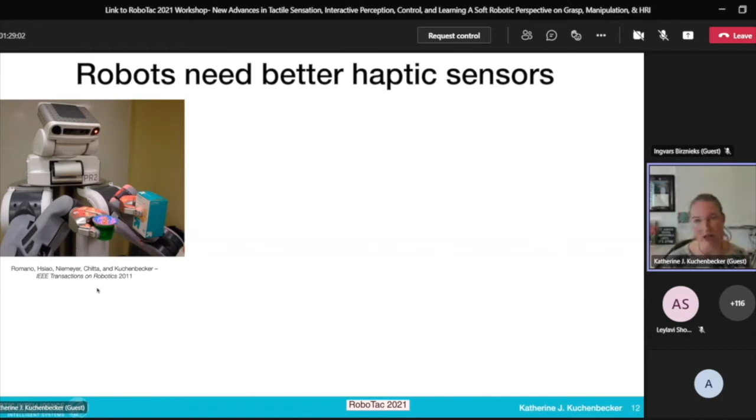But just to take you back, when I was an early professor at Penn, we took part in the Willow Garage beta program. We had a PR2, and we did some work on using its rather rudimentary but robust and functional tactile sensors. There were just a small number of pressure cell sensors on each of the fingers, and they could only be read at like 24.4 hertz, but luckily there was an accelerometer in the wrist, and you could use that to get hand clasps,

and if the object in the robot's hand was set down, you could get transients. You get high temporal resolution from the accelerometer, and something about pressing and squeezing from the finger pressure sensors, but they weren't rich enough to really even identify what the robot was touching. You could pick up stuff without knowing much about what it was.

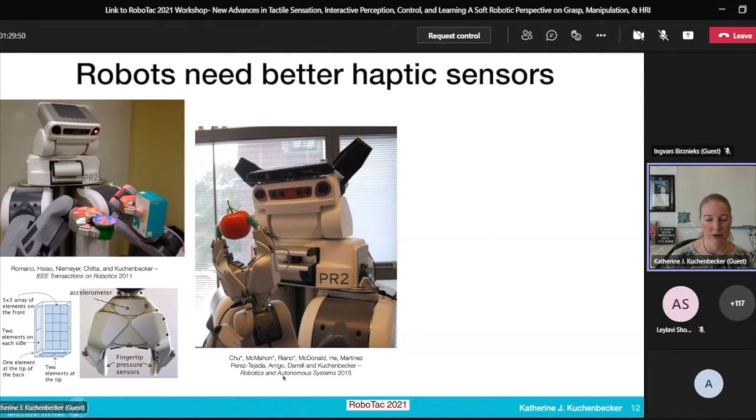And so working with Trevor Darrell at Berkeley and a bunch of wonderful students, led by Vivian Chu, Ian McMahon, and Lorenzo Riano, we added BioTac sensors. These are sensors that came out of Jerry Loeb's lab at USC for prosthetics, and they imitate the human sense of touch by having many channels. They're biomimetic. You can sort of get shape.

It's actually an impedance system going through fluid inside the rubber skin. There are all these different electrodes. You can get the internal pressure, the AC pressure, which is about the vibration, and something about the temperature. But you can't really physically interpret these 19 electrical impedances in terms of forces. It's absolutely not a force sensor. It's closer to a deformation sensor, but even there, it's not so physical. As a mechanical engineer, I'd really like to know, what is this quantity I'm measuring?

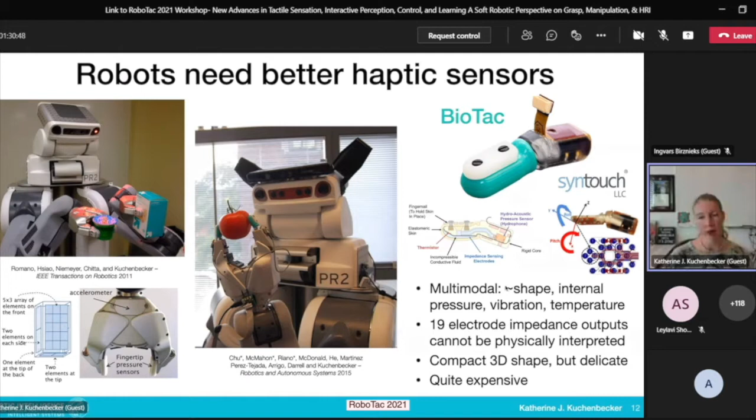We love that it's compact, like a half hemisphere, but it's very delicate. We have broken so many of these sensors, and unfortunately they're quite expensive. So maybe robustness could be improved, but we have used these a lot and gotten great benefit out of them, and I want to see the field push even more in this direction. So, a few motivating observations that underlie both of the projects I'll tell you about.

Physical contact, whether you're human or robot, can take place all over your body. Ideally, I think robots should be able to feel over all of their surfaces, not just on their tiny little fingertips. Softness helps us control contact, moving from position control into force control very quickly, and managing that elegantly, picking something up, shaking something around, pushing a key in a lock. Softness at the interface between the agent and the world is helpful. We also need robustness. We need sensors that aren't going to break when they're subjected to these physical contacts.

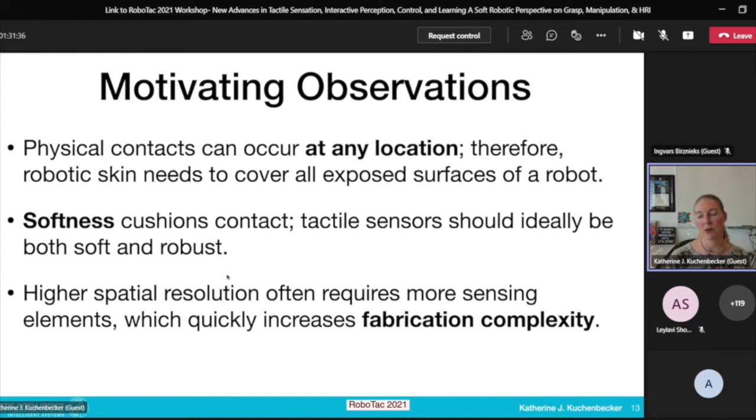I personally find that when we want higher and higher spatial resolution, if we have to have an individual taxel, a sensing element for each one, the fabrication complexity, the overall system complexity, gets really high. So I'm quite interested in ways that are more efficient, or can sample over a broad range, where we can simultaneously acquire data from a large area. And we've also had great benefit from bringing in machine learning beyond just physics to get better sensing performance.

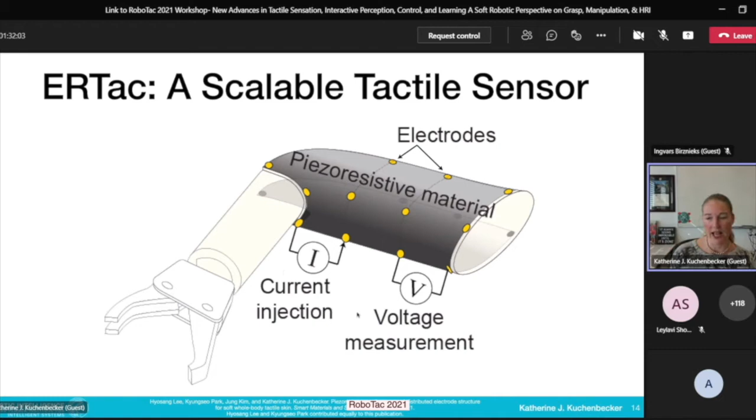So the first of the two projects I'm going to tell you about is called ERTac. It's an electrical resistance tomography tactile sensing project. This is a big project where we're looking at whole body sensing. This work is led by Hyosang Lee, who has been a postdoc and research scientist in my team since 2017, and he's about to start his independent scientific career on October 1st at the University of Stuttgart as a Cyber Valley group leader. We've had visiting PhD students from Jung Kim's lab and other members of my team, and more recently Huanbo Sun, who's here in the audience, and Georg Martius have gotten involved in the learning.

And we've published, these are like the 5 main papers: 2 ICRA papers, a recent Smart Materials and Structures journal article, a Transactions on Mechatronics article that's accepted but not yet published, and we have a big paper under review that I won't talk about, but I'll just hint at. So you can follow up on these. I'll put the citations at the bottom so you can follow up on them if you want.

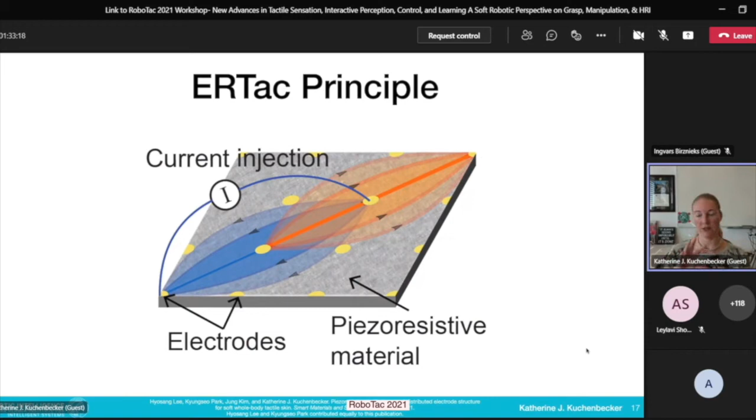So the main principle, and this is what Hyosang and Kyungseo developed, is that we make a fabric-based laminate, and we intersperse just point electrodes, and then we apply a current between 2 electrodes, and the current will flow through, and locally pressure changes the electrical conductivity, the resistance locally, and then by taking different voltage measurements from other pairs of electrodes, we can reconstruct. It's a tomographic method very similar to medical imaging, where the high conductivity areas and the low conductivity areas, but with a very simple fabrication approach.

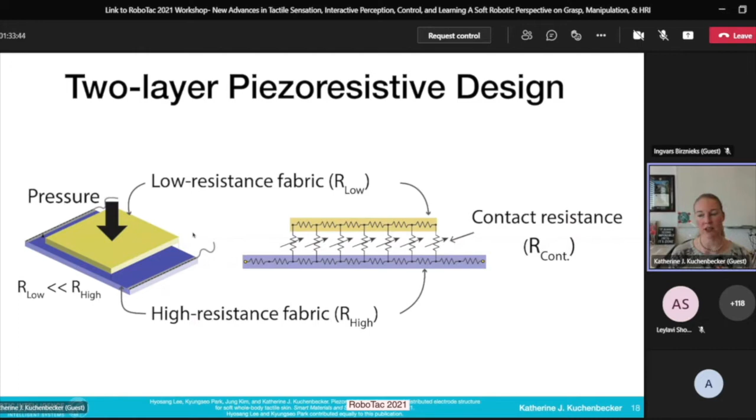And so just shown more closely, we have these conductive patches that are laying through contact resistance on top of a medium resistance fabric. And so by default, the electricity will pass through the lower layer. And if you push, then the upper layer that's very conductive will press in and locally make a really easy path. And so by changing that contact resistance, we can change the conductivity across a large space. We put neoprene rubber on the top to kind of smooth the contact.

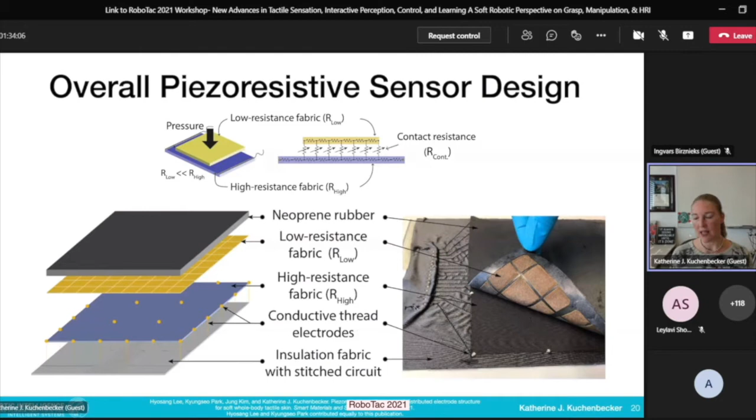You can see here we've tried different arrangements of electrodes and proven that having these electrodes in the middle makes a big difference for getting good resolution in the middle. Otherwise, you don't have good sensing. This is what a real sensor looks like. The circuit is sewn with a sewing machine to get the conductive thread going to all the different places. We use high-speed electronics and an FPGA to switch all these different pairs. So over time, we inject current and then scan, inject current, scan. So that happens really, really fast. We get this long vector of these voltage readings, and then we reconstruct that.

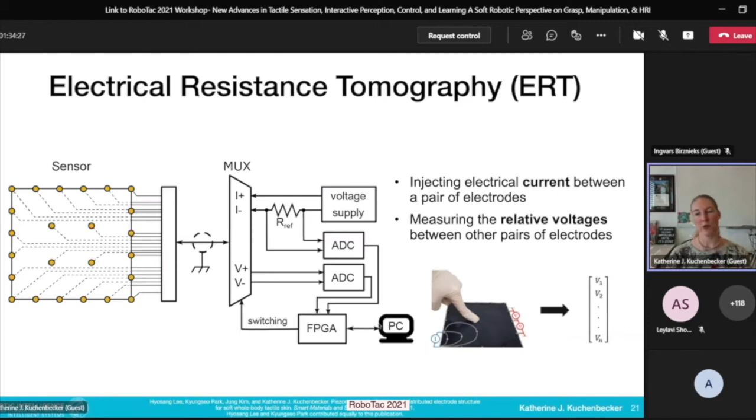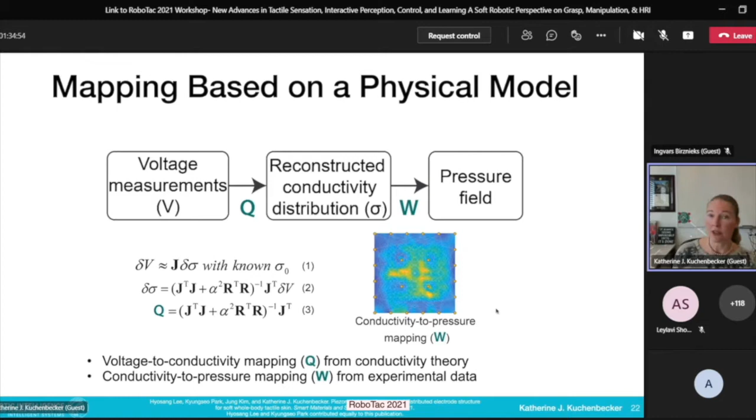In the beginning, we were always doing this with a model. We basically build a simulation and we perturb it, and then we construct the Jacobian around an operating point. So we subtract the expected voltages for a no-contact case, and then we can linearly extrapolate where the conductivity is changing, and then we use physical calibration to go from the conductivity distribution into the pressure. And that's actually really important because conductivity doesn't go linearly with force. We also have done a lot with optimizing the scan patterns and using math to say which ones we should recruit. We don't need all of them, and so we have a somewhat optimal pattern.

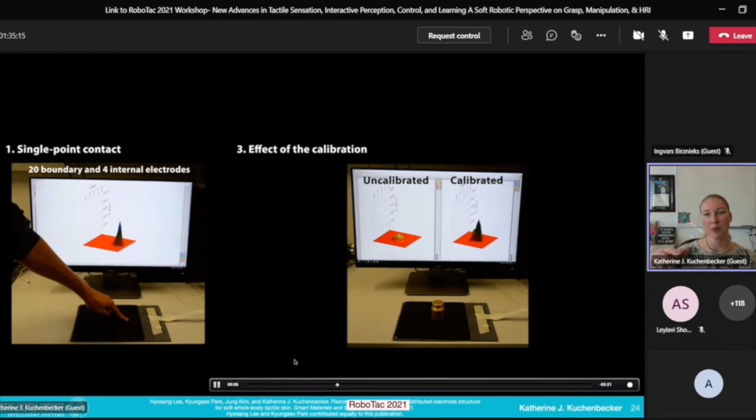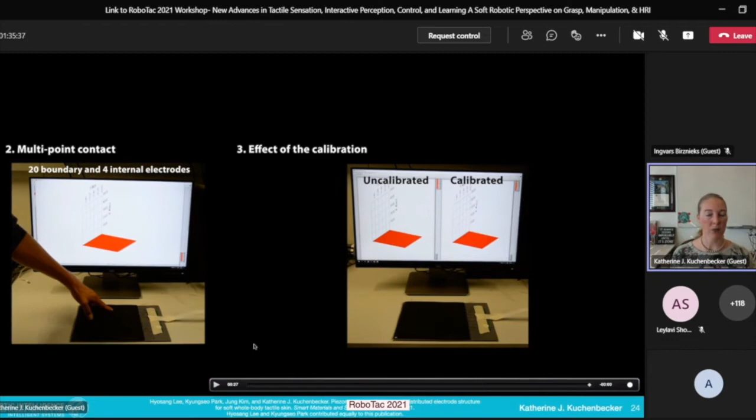And then here's some results. On the left, this is with the sensor that has central electrodes, and you can see Hyosang pressing. And on the right, this is showing the benefit of that calibration from conductivity to force, where we have a constant mass moving to different locations. It should have this constant pressure profile. And if we don't calibrate, we basically just show conductivity, you can see it really differs spatially, which would be confusing, and we can correct that. And it's very dynamic, it's very fast. We can run the frame rate really fast and have multiple contacts with quite simple and robust physical hardware.

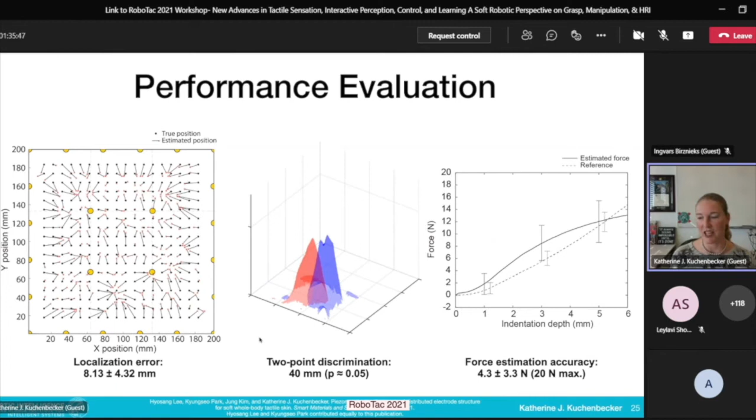We've done lots of performance evaluations looking at 2-point localization, 2-point discrimination. We try to take some inspiration from human touch, and overall force magnitude, but this is a limitation. This is only normal force. Kyung-seo also did a really nice study, the Transactions on Mechatronics paper, where we had the idea of maybe the sensor is scanning everywhere really fast, but kind of cursorily, and then as soon as contact happens in a region, we dedicate more resources, more scanning patterns in that region to get higher resolution. So distinguishing between contact and no contact.

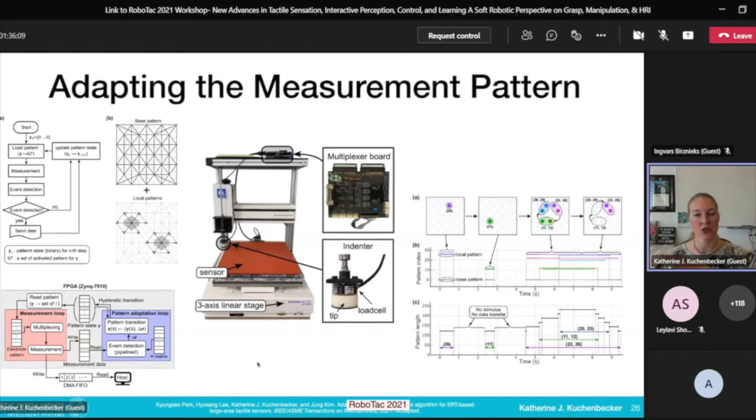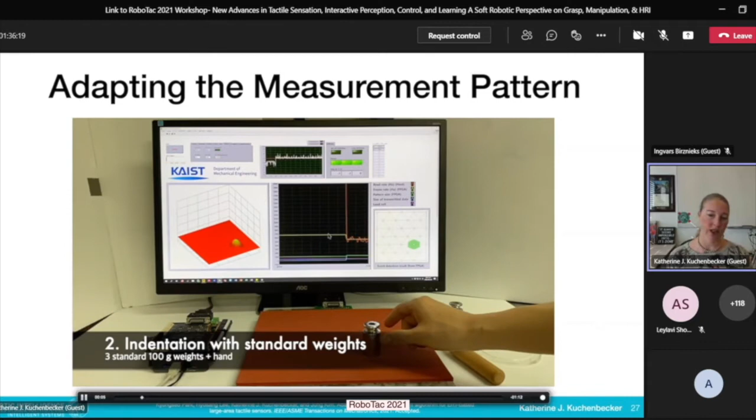And so the sensor is constantly, and this is a nice video of Kyung-seo demonstrating his system. So again, he's going to place weights on it. And now you can look at, these are showing where it's additionally scanning. So there's a base pattern that's doing overall awareness, and then as it detects contact in different regions, you can see this is the reconstruction. Also, Kyung-seo can go and touch and push in different areas, and the system is constantly adapting to what it feels.

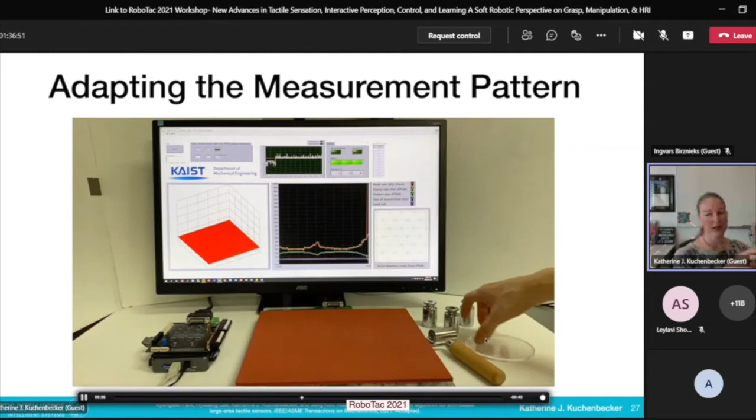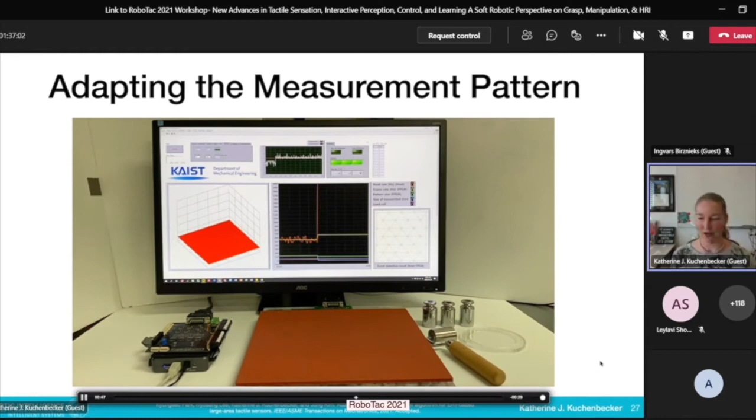And I think that's also a powerful idea, because then maybe we can reduce our energy use or reduce our computational load when we're just sort of ambiently aware, but then when something interesting happens, like when you're feeling the circle pressed, we just want to spend our scan time and get higher resolution where we know contact is really happening. And so the author version of this article is online, and you can check it out if you want. So these were all done with physics, though, because we know the underlying resistance and pressure are relatively straightforward.

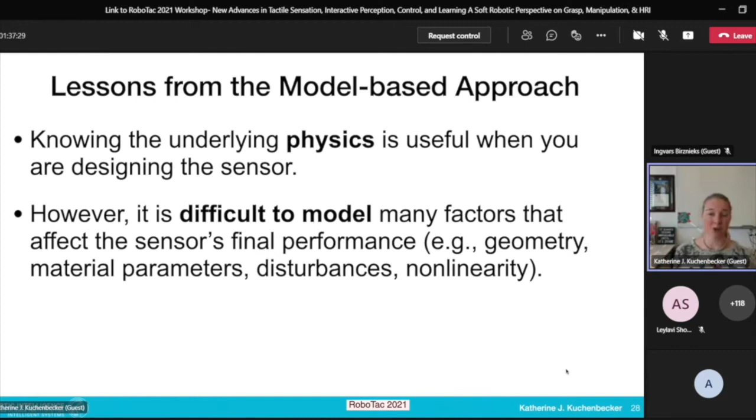There's some improvements we can make; knowing those physics can help us design the sensors well, but there are invariably factors that are non-ideal. There might creep in slight inaccuracies in the fabrication, slight material inconsistencies, or contact resistance. It just varies in different locations. There are disturbances, the contact resistance, the wires connecting to the soft sensor. It's really a pain, or nonlinearity. And so the longer we worked on this approach, the more we were drawn towards data-driven methods.

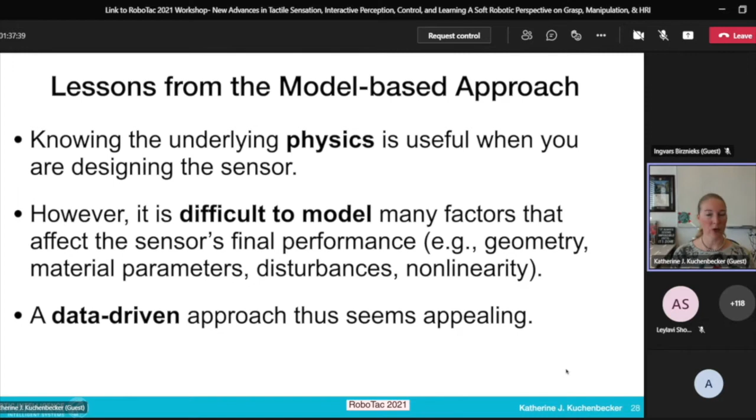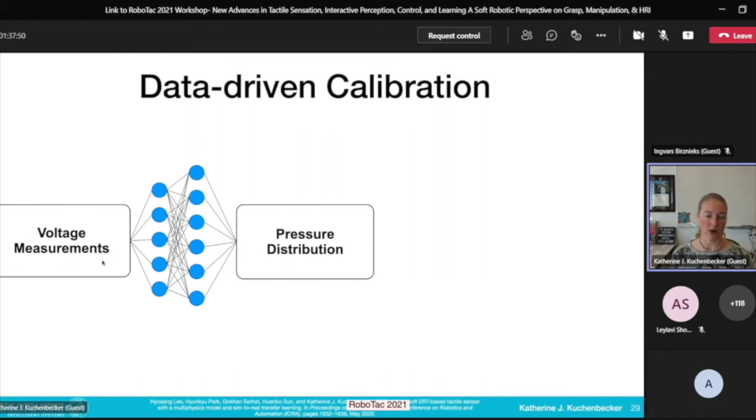This is an ICRA paper from last year, which was our first effort at using simulation and deep learning, where we wanted to say, could we use a deep neural network to go from voltage measurements to pressure distributions? We set up a stage that could press on a sensor, but with end-to-end learning, taking these voltage measurements to a pressure distribution, you need such an enormous data set, because think of how many contacts there are, how large each contact is, how high the force is. It's just completely impractical if you want to do multi-contact.

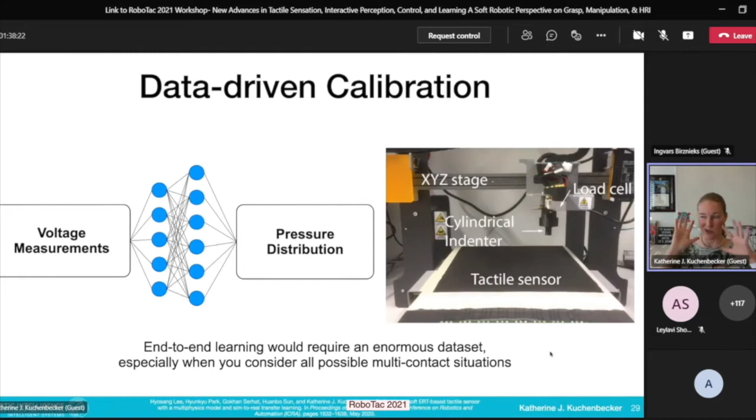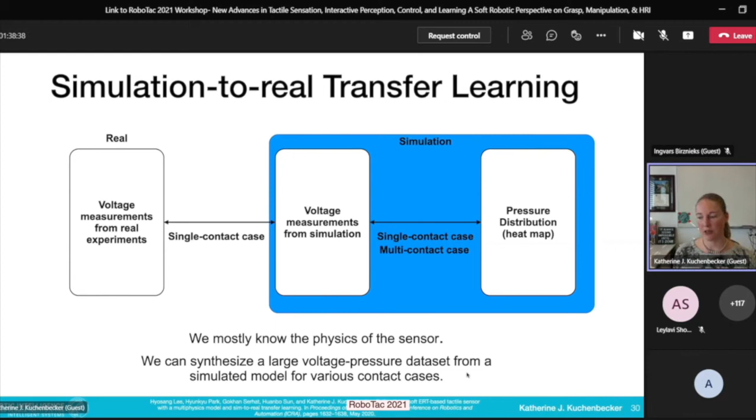And this sensor unfortunately doesn't generalize, doesn't have a good superposition principle. That's kind of a disadvantage of this. You really need to know this nonlinearity in the tomography approach. So we started building a simulation of the physics of the sensor, so we can synthesize a large data set from a simulated model for various contact cases, and then combine that with just a small amount of real data. Our multiphysics model has mechanical, then conductivity, and also this deformation.

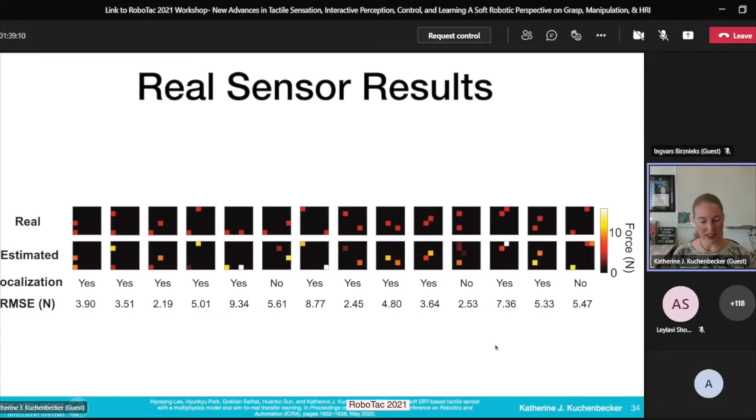We compared end-to-end learning with having a lot of simulation data and this physics model in there. In the ICRA paper, we split the learning into where contact is happening and how hard the force is. More recently, we didn't have to do that. Here's an example of a pair of weights placed at different locations, and what our network outputs. This is just 6 by 6, but we can get the contact locations pretty well. At the time, force wasn't very good, but it was only trained on single contact. So we did a lot more work on simulation and a different deep neural network structure, and that's under review, so hopefully we'll get reviews in a couple months.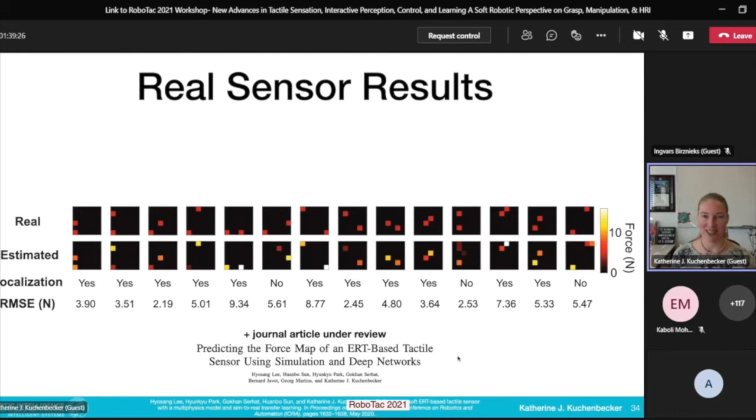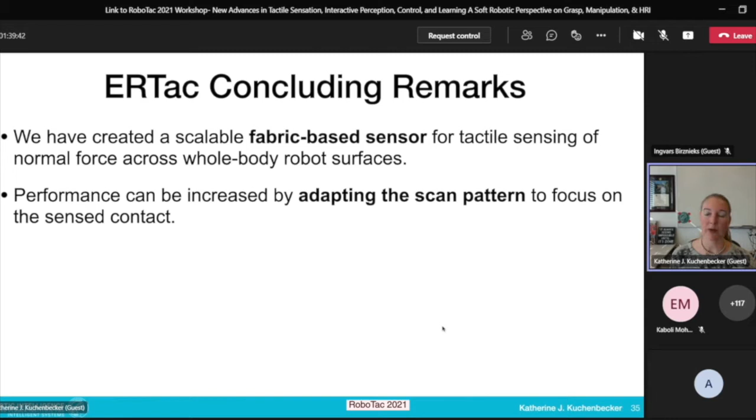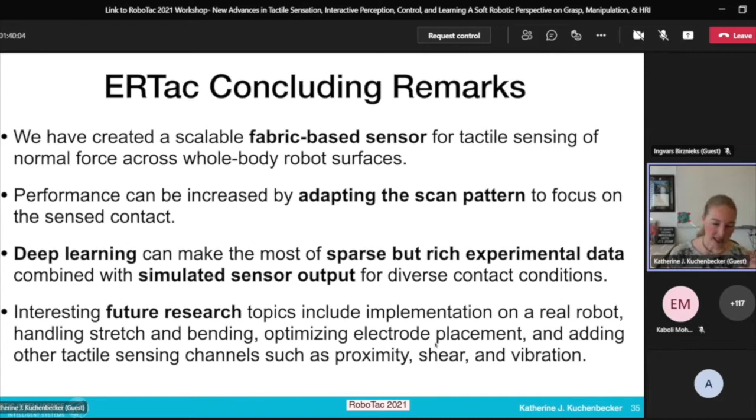So this is the first project I wanted to tell you about, this electrical resistance tomography approach to tactile sensing for whole body skin. These fabric-based sensors are robust and soft, and we can adapt the scan pattern if we want to make them more efficient or better resolution. Deep learning has really served us well, especially to combine the sparse but rich experimental data with simulated data. We tend to transform the real data into the simulation, so we can have huge amounts of simulation and just a little experimental data to anchor it in the physical world. There's lots of interesting future work, but I'll move on to the second project so I can do it justice.

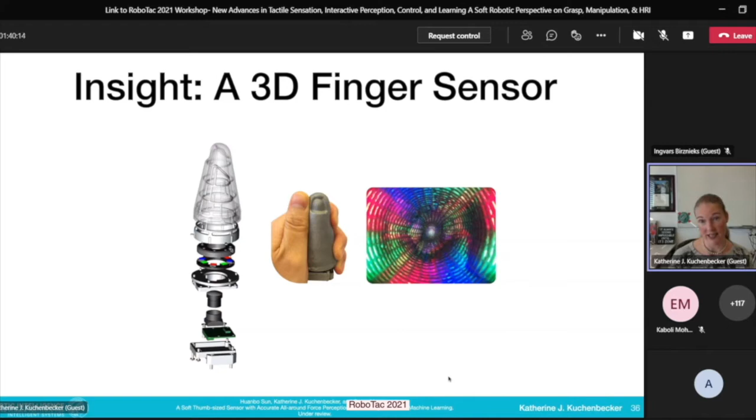So the second thing I want to show you is this new sensor we've created called Insight. It's about the size of a human thumb. This is work by a smaller team: Huanbo Sun, who's here in the audience. Hi, Huanbo. He's a PhD student with Georg Martius, who's an absolutely brilliant group leader in the Tübingen site of our institute. We've had a lot of fun working together as part of Huanbo's dissertation. He'll be graduating soon. If you need a postdoc, I highly recommend you talk to Huanbo.

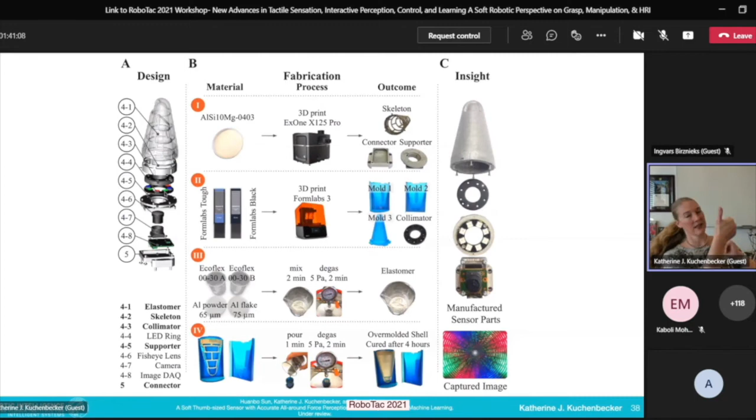Huanbo figured out really cool ways to fabricate. We 3D print this metal skeleton, which you can see here, then he places it in a mold and overmolds it with a single layer of opaque but shiny silicone polymer. It's very thin and very sensitive, and the skeleton is inside, so we don't need multiple layers. It's very fast and robust fabrication. And there's a camera with multicolor LEDs looking up inside the finger, inside Insight. This is the sample image, and our network compares it with the reference image.

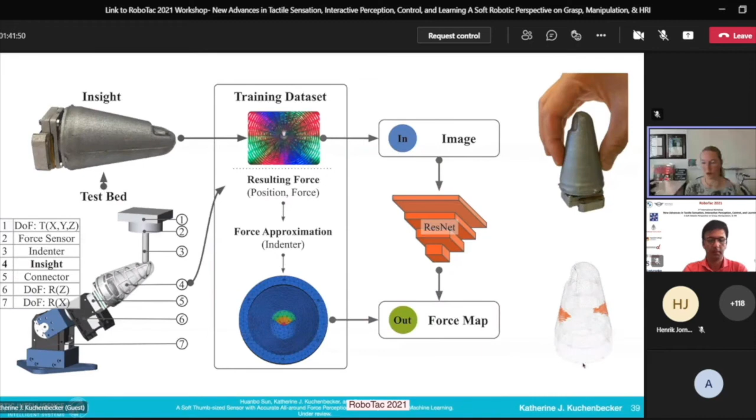To label, we have a test bed, again a 3D printer with a two-jointed motion stage, so we can take a lot of data with about a 4 millimeter diameter indenter, and each one is labeled with a little pressure distribution, and we measure the force. We're doing not just normal force, but also shear. The indenter touches Insight, presses to different levels, and also applies traction, translating laterally. Then our network learns to predict these 3D force maps. We also do single contact, but I'll show you the force map, which is a discretized set of points, each with a 3D force.

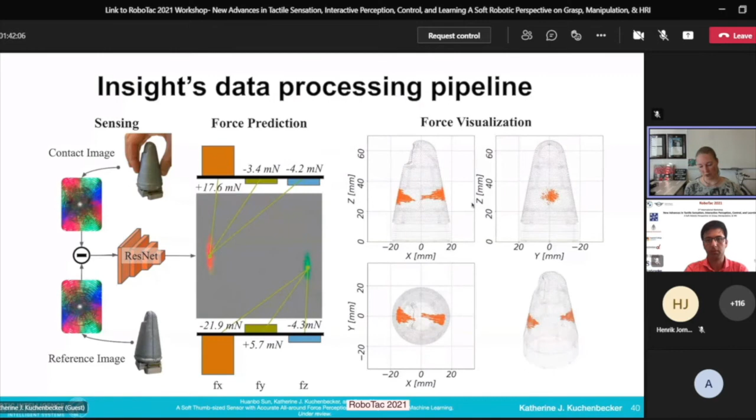So again, the network takes the current image from the camera looking inside the sensor, and then outputs this 3-channel, so XYZ force across a 2D image, which is remapped to the whole surface of the sensor, and we can then draw the 3D force vectors. So let me show the movie.

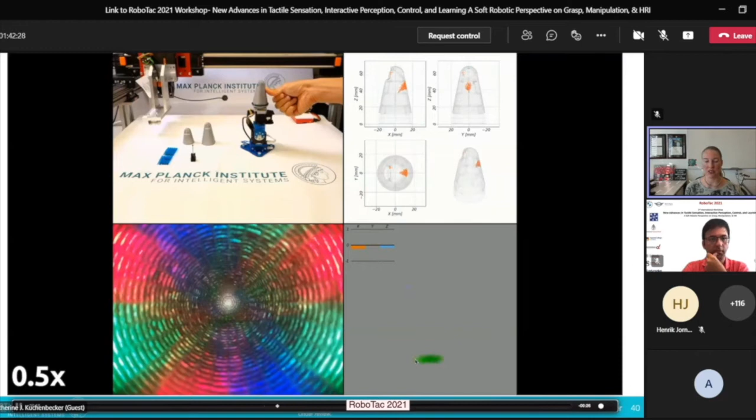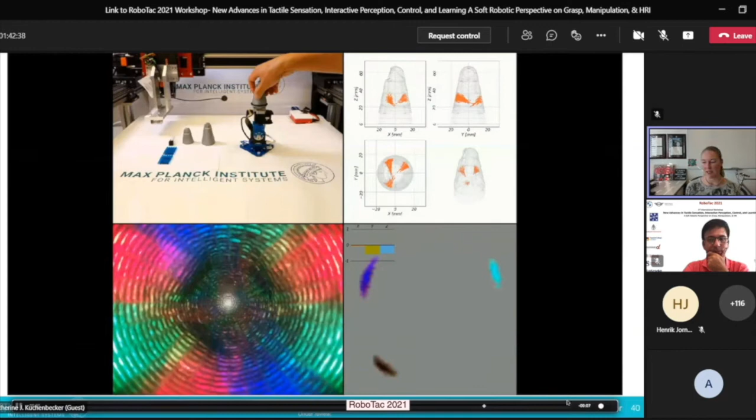I'll just jump forward to multi-contact. So there's no limit to how many contacts that can be happening or the size of the contacts. And yeah, so it gets shear and normal force. I think the main innovations here were this soft, rigid hybrid structure, the imaging. We're using both aspects of photometric stereo and structured light.

Doing this automatic data collection, it would, I think, be totally infeasible otherwise. Here in this project, simulation has played no role. We only use real data. And then this relatively straightforward deep network built on ResNet. And we're able to achieve an overall spatial resolution of about 0.4 millimeters over a size of 40, 50, 60 millimeters.

We can get our force magnitude accuracy. These are all medians of about 0.03 newtons, so it's very, very precise. And we're also looking at the accuracy of the direction we predict, up to about 5 degrees median error on a force range up to 2 newtons.

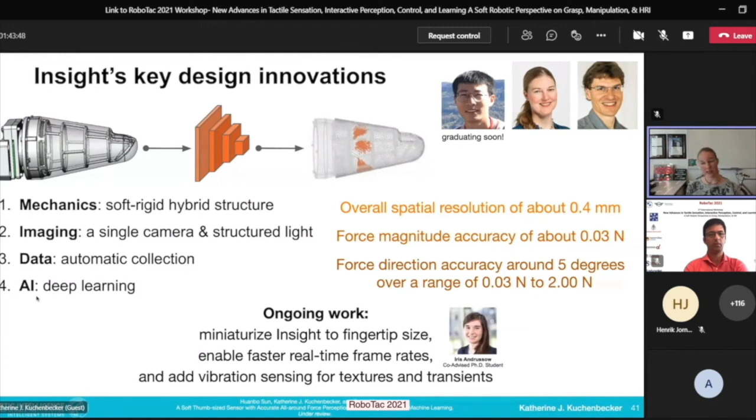We're also having ongoing work by our new co-advised PhD student, Iris Andrussow, on miniaturizing the sensor, enabling faster real-time performance, and adding vibration sensing. If you know some of my other work, you know I love accelerometers and vibration and texture and transients. So we want to endow Insight also with ability to feel textures and contacts like that.